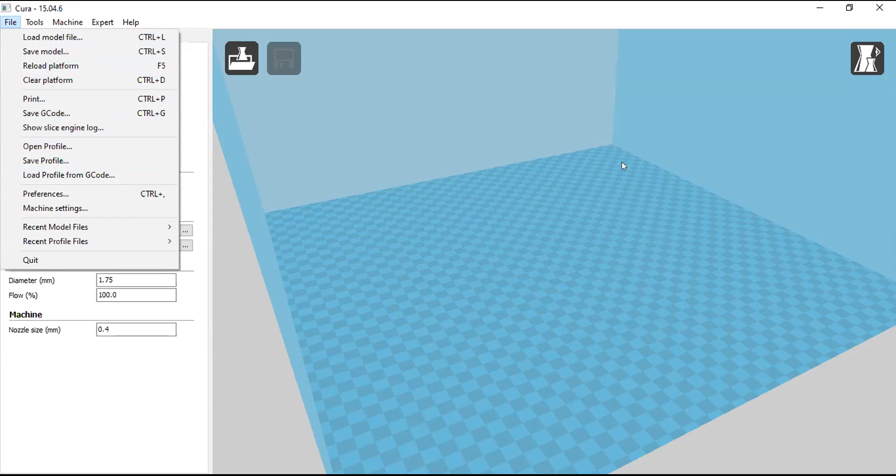So these are the basic settings you can find right here. But in order to get this environment, you just have to set up the machine first. To set the machine, you can see right here the third option, which is the machine.

I have already added the two machines that we have, the first one is the Parmann 3D printer and the Shaperjet 3D printer. Let me show you, when I'm switching to the Shaperjet 3D printer, you see right here in the environment section the size of the build volume or bed volume is changed.

Now you can see the bed volume is changed because this printer volume I have defined, which is 150 by 150 and in height it is 180. So I'm just going to repeat that machine specification of this machine as a new one by adding a new machine.

You can see I'm clicking on the add new machine by using a left click of the mouse button. Once I have clicked on add new machine, you can see this window will pop up. So in this menu, you can see here is the add new machine wizard.

I just click on the next button. Once I have clicked, you can see there is a predefined 3D printer list which comes up, and you can see there is an 'other' option.

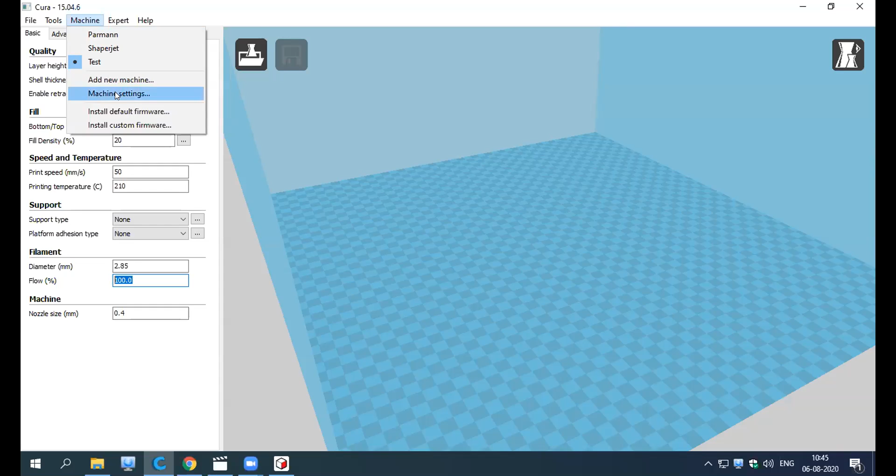So in order to add another extruder in this machine, I'm going to the machine setting right here in the machine option. Once I click, a pop-up window comes up, and I can also customize a Parmann 3D printer right here, Shaperjet, and we have already added the latest machine, which is the test.

So in this case, my extruder count, you can see here right below the dimensions of the build volume, you can see the extruder count. I'm just going to click on 2, because it consists of 2 extruders. Once you are done with this, you just have to click on the OK button.

Now the left side of the window is refreshed. Now you can see here is the filament option. For the first extruder, it asks for the diameter, what kind of diameter you are going to insert in the nozzle of the filament. So now you can see the second diameter of the filament comes appear.

So this way we can add the machine and customize the machines in this software, and you can also observe that we can add multiple machines in this software. Once you are done with the machine settings,

you just have to customize the basic setting according to your STL format. Let's start by inserting a model into this workspace. You can see here is the load option right above the environment section.

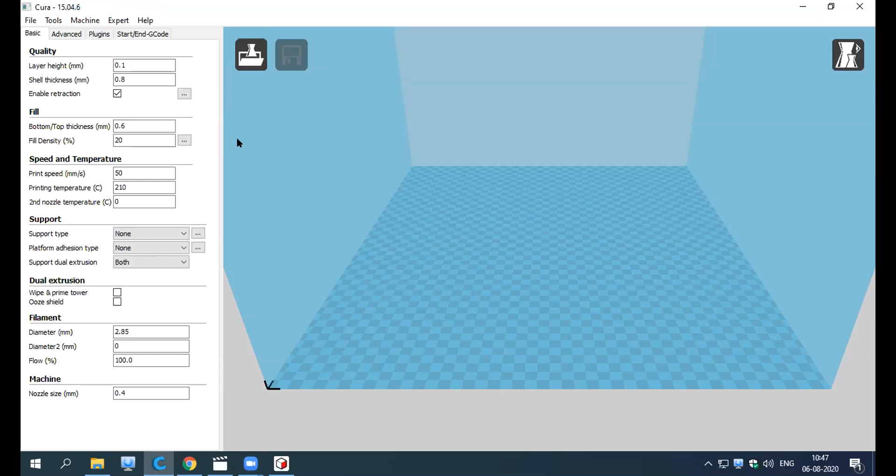So I'm just loading a new material, your STL file, which we designed in a previous session, which is the pen stand design. Once you go to the STL file, you just have to select it and open it, and it appears in this environment.

So in this environment, you can see there is a black arrow right here, which represents the coordinate system, or the position of the extruder, the home position of the extruder. So when I'm going to start the printer or turn it off, my extruder will position at this coordinate system.

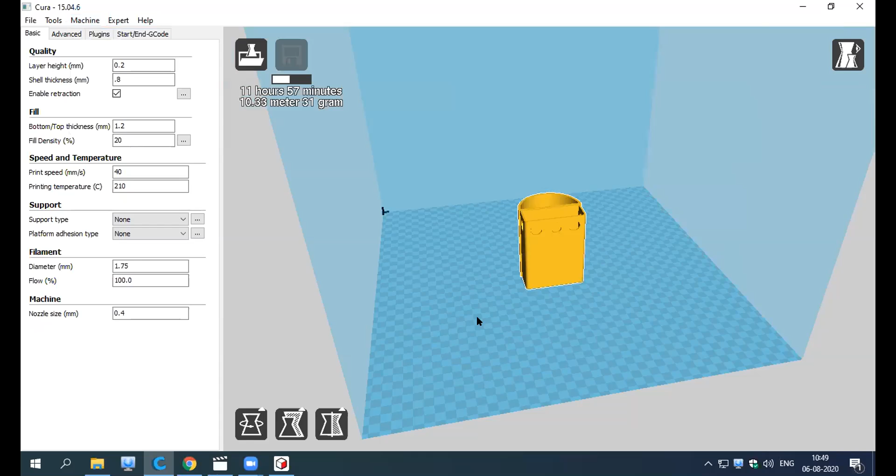So once you have inserted the design, in order to print it, you can see here with this setting, this much time it would take in order to print with this kind of resolution. So I'm just going to shift into the Parmann printer right here. First, you can see, yes.

So in basic setting, at the very first, you can see here is the quality section. It is the first option, which is layer height. The layer height is normally a multiple value - you can define the resolution of your printing process for printing your object. If you want to print in higher resolution, the printing will get slow and it would take double the time. I just pressed 0.1 right here. You can see the time would be double in this case. Previously it was 0.2, and it would roughly take 15 to 20 hours.

So if I'm going into the layer mode, I'll explain this later. I just want to show this: the layer height is the diameter of the filament coming out from the nozzle. That diameter, when placed on the 3D printer bed, becomes the layer height. So I hope you can understand this - the 0.1 layer height means that the material coming out from the nozzle is 0.1 mm in diameter.

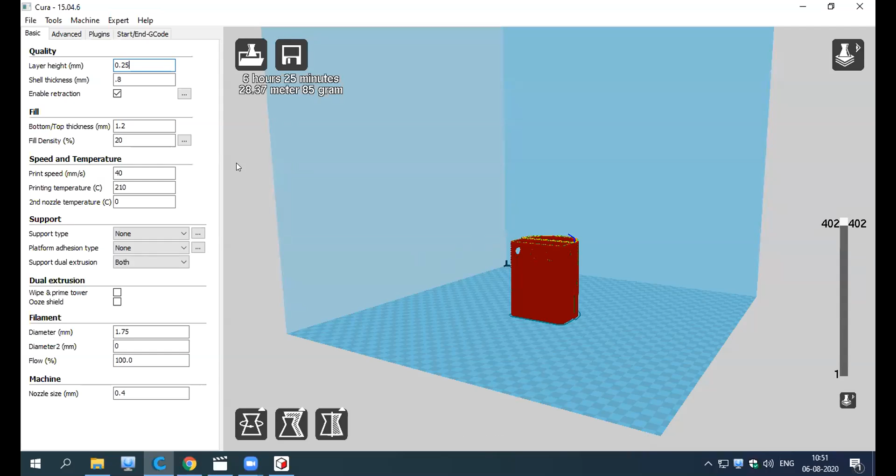So if I'm increasing that diameter, which is pretty fine for the print in order to print all the STL designs or objects, in 0.2 cases we can extend it to 0.25 to get better accuracy. But the accuracy mostly increases when the resolution is refined, or decreased to 0.1 to 0.2. So I always prefer 0.2mm layer height for better strength, better resolution, and printing time would be perfect at this layer height.

So after this, you can see there is a shell thickness. I'll show you what the shell thickness is, right here in the graphic window. Let it complete the percentage. Now it is completed totally. So you can see the red sides of the object are defined as the shell thickness.

So right here, I just put 0.8. Why did I define 0.8? Why not 0.6? Why not 0.7? The shell thickness is a multiple value of the nozzle size. So if the diameter of the nozzle is 0.4, you can print the shell thickness with 0.8, or either 1.2, which is the maximum shell thickness for the object, or you can add 1.6.

So if you mistakenly enter 0.7, it shows yellow, or when you move your mouse into this software, you can see the yellow section comes up here, and it shows the currently selected shell thickness is not a multiple of the nozzle size. So the shell thickness should be a multiple value of the nozzle size.

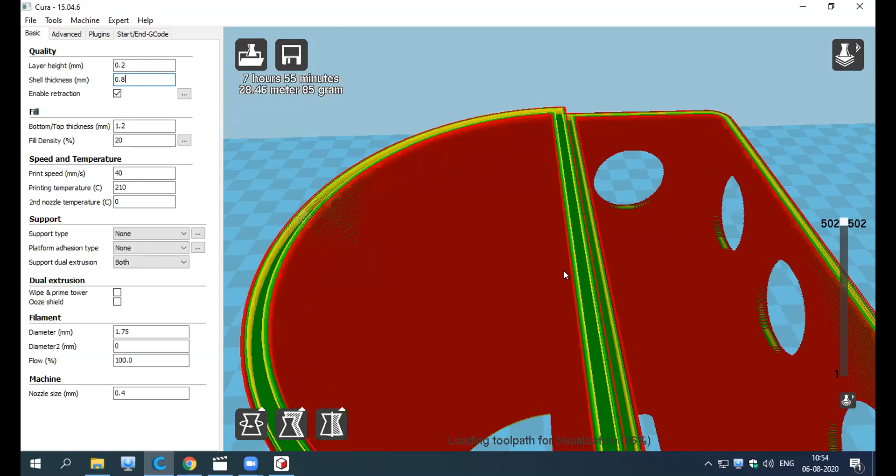So if we're done with this, I'm moving forward with fill. Fill is used to define the fill, shown with yellow color in the object, which is visible right in the environment. In this case, I'm coming to fill density first. The yellow color represents the fill density. Right here, it is only 20% fill density.

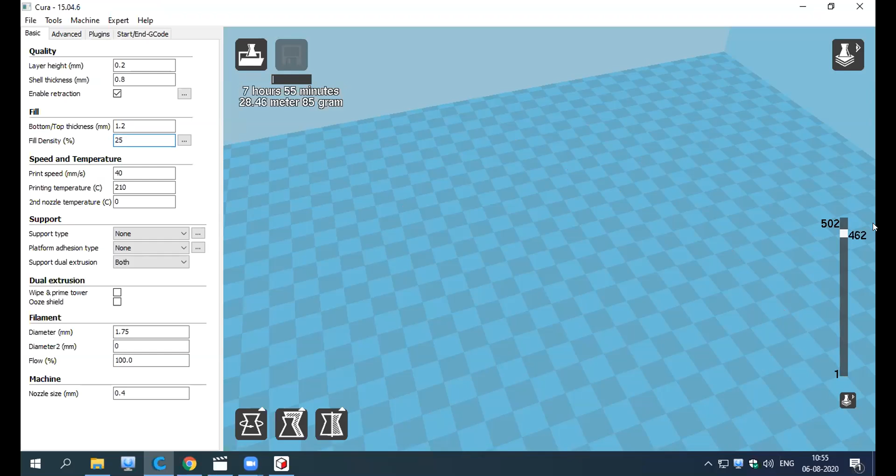We have created the walls of the object, let me bring down that layer. Now you can see the fill density right here. So at 20% fill density you can come up here. If I increase the fill density more for the object, say to 25%, it takes time to refresh the window, and there's some visualization loading. It takes certain time to represent the fill density.

Wait for it. So I'm just adding a few things. The visualization depends upon your system configuration, it varies the time to visualize the object fill density. So you can see once I've clicked on 25%, the density has increased. Now I'm just going to change it to let us say 50%. It's again going to refresh.

So if you are increasing the fill density, you can see the time would automatically increase because more material is going to be added by the 3D printer, and it would take more time to print. Also the consumption of material would increase. Basically we are using a PLA filament, which is polylactic acid. Now the fill density is refreshed, you can see it getting denser by increasing the value.

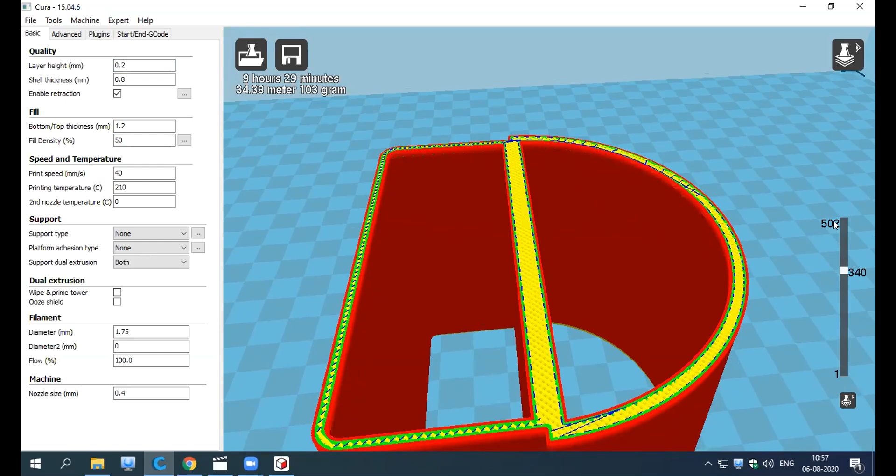You can check by just dragging this bar, and the number represents the layer number from 1 to 502. In this particular case, with 0.2 layer height, it would be completed in approximately 500 layers. So the bed in that direction will go down into the 502 layers. We are particularly right now at 340 layers. So you can see the fill density is continuously the same at all the layers which we defined right here.

So I'm coming to the bottom or top thickness of the object, which I've defined to get better thickness from both sides, even at the bottom or top side of the object. In this object, you can see the top side is totally filled. Whatever mm you define here totally overrides the fill density. So I've filled right here 1.2mm, so the 1.2mm from the object will be totally filled by the 3D printer. You can see how many layers are filled by the 3D printer.

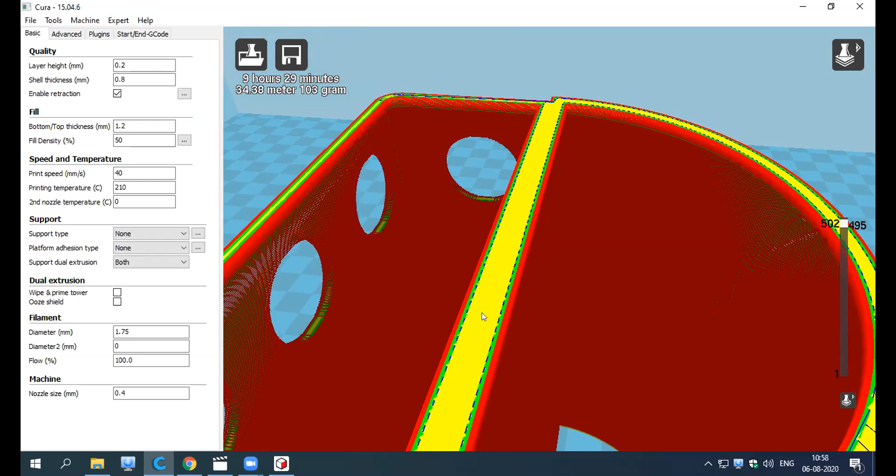Approximately right here, yes. The total 5 or 7 layers is totally filled by the 3D printer for this object. And for the bottom thickness, I'm just moving it to the lower level. See.

You can see the very first layer, which overrides the fill density due to I have just defined the 1.2 mm thickness should be solid from all sides of the object. So first layer, second layer, third layer, fifth layer, and then so on.

You can see when I'm moving to this side, it doesn't show right here because it moves to the further layers, so it doesn't show any visualization for the previous layers that is going to be printed by the 3D printer. So in this case, you can see all the boundaries of the object, because there is no solid part in between in this pocket or the shell.

If I'm moving further, I'm just going to show you. You can see here the blue lines in this object, which clearly define the position of the extruder, like how it is going from here to here, and how it is going to fill this density. So the line represents the traces of the extruder, represented by the blue lines.

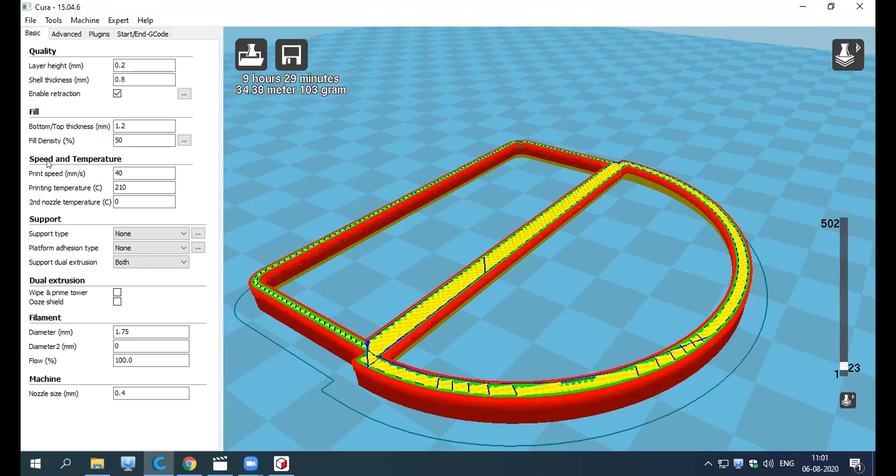So once we've defined all these settings, there's also the third parameter, which is the speed and the temperature. You also need to control the printer speed, printing temperature, which is the crucial part in order to print the PLA object.

So the printing speed can vary up to 50 mm. We can define the printing speed from 35 to 50 mm, which is pretty fine in order to get the maximum resolution or quality. If you are increasing the speed, the quality gets worse. You can see some of the objects get printed roughly from outside or the inside.

It's visible from the walls of the printed object. So I'll show you in the video. If you are very expert, you can play with the printing speed, and you can also play with the printing temperature. So the printing temperature depends upon the filament that you are going to use in order to print the object.

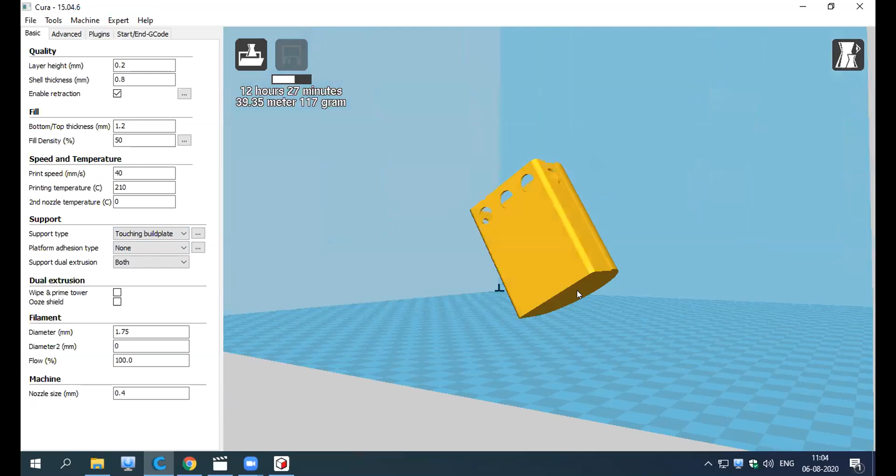If some of the material is overhanged in the air - if I'm just going to rotate this object, you can also rotate this object from this section. If I'm going to rotate this object like this way, you can see some of the material that is overhanged. In order to support this material which is overhanging, you can define the support system for this object, but which is not necessary for this case. So I'm not going to show this right here.

I'll cover all the support system and dual extrusion in the next session. So once you are done with the speed and the temperature, you just have to define the diameter of the filament. So the diameter of the filament also comes with the filament specifications.

You can also see on the print filament box. For our case, the diameter of the filament is 1.75 for the first extruder, and similarly for the second extruder. But right now I'm not using this second extruder, so I'm putting it as 0. The flow of the filament through the extruder should be 100%, so make sure you are filling that right here. And the nozzle size, if you want to change the nozzle, you can also define the nozzle size right here.

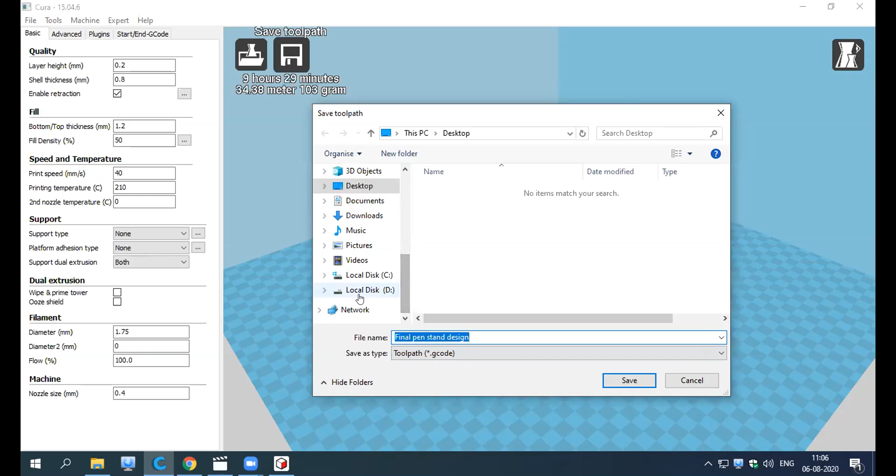So this way we can define the basic settings in this software in order to print this object. Once you are done with all the settings, you just click on the save toolpath option. A window comes up, and you can see the toolpath file save tab in G code. You select the pen drive or SD card, or save directly into the directory. Once you've selected the directory, I selected D, and pressed save. So you can access the G code in the D drive. Once you insert the USB, you can copy it from there to the USB or SD card, depending on your feasibility. Then you just need to insert that SD card into the 3D printer in order to print it.

So this is the Cura software where we can customize our STL objects, and you can see how we can convert it into G code by simply adding a few more settings according to our requirement.

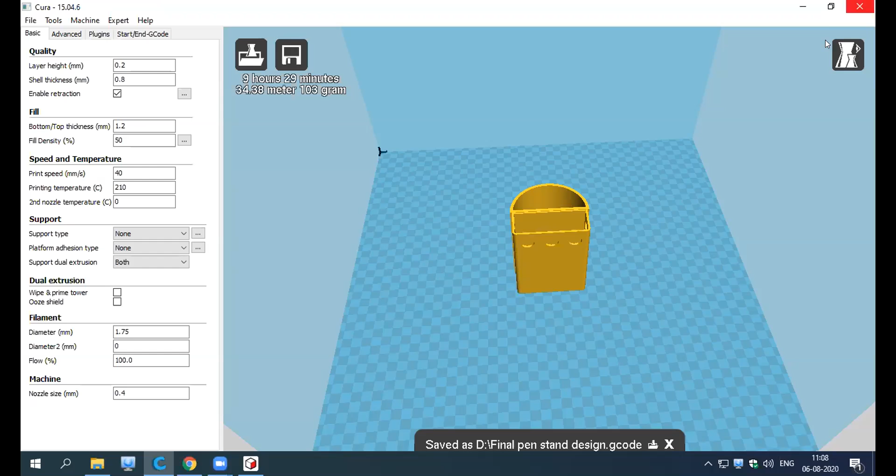Sagar sir, Chandra sir, I suggest you can quickly show the video of the 3D printing without adding anything, so people can relate to what they have just listened to. They should be able to relate it to actual 3D printing. We can just play the video. I prepared a video shot for the upcoming design, which is the nut and bolt. I don't think that's a good idea - you should show the video of this particular thing only, which we showed yesterday also. Don't show your current design, that excitement will go away if you show the current one.

Let me shift to the screen. Can you see my screen? I think you can play it now. Yes, you are seeing my screen. I hope you are.

So these are the settings that I have placed as a screenshot in this video.

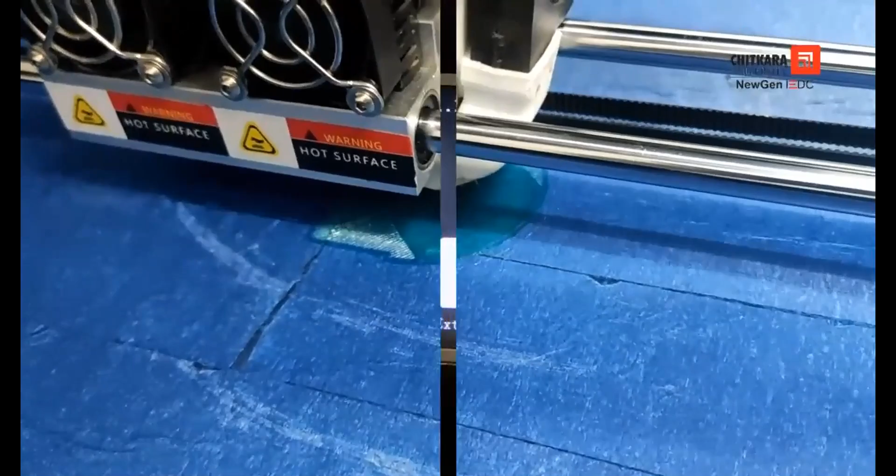So here you are just seeing - I have reduced the speed, and once the material is properly stuck to the printer bed, I have increased the speed from 80 to 100% to ensure that the object is getting perfectly in shape by the 3D printer. So this is almost 15 to 17% of the object completed.

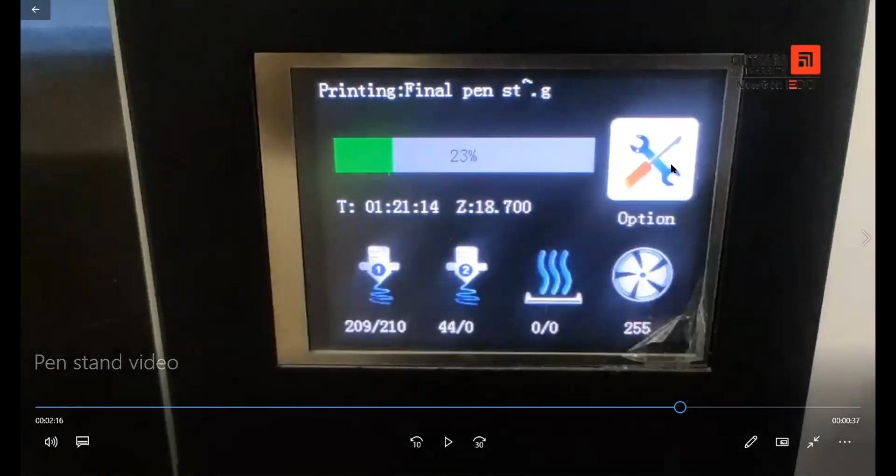You can also customize options which are not required at this time. The advanced options are typically needed at the very first stage, used to reduce printing speed, fan speed, or extruder temperature. If the material is not getting perfect shape, you can change the temperature right from the control panel of the 3D printer. You don't need to customize the printing temperature from this software.

So you're saying you can control the temperature with this machine also? Yes, everything, right? Yes. I think one important thing I've noticed is that let's say you want to

get something 3D printed and you go to an external vendor. If you don't know the intricacies of 3D printing, about density and all those things, there are high chances you can get cheated, because if the vendor reduces the fill density, the cost comes down for him but he can charge you more. Can this happen, Chandra sir? Yes, it happens sometimes, sir. If we know what volume it would take to print that object, we can understand how much time it would take.

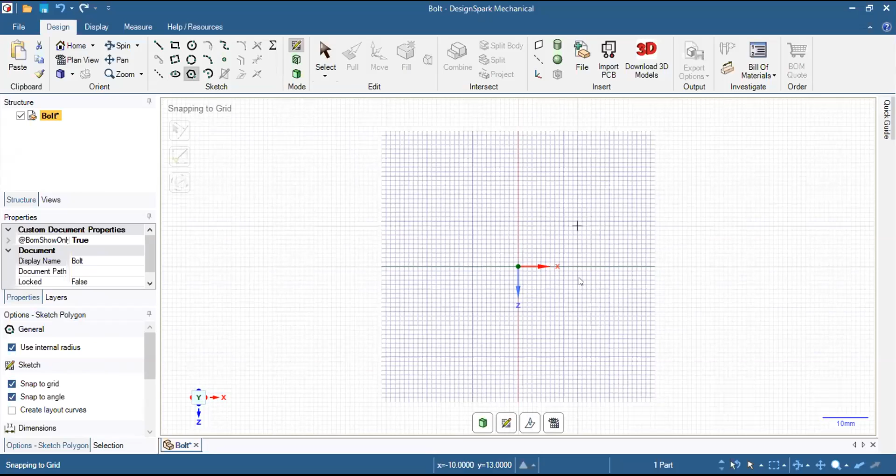Here you can see the coordinate system, which is XYZ, and I'm just clicking right at the center of the coordinate system, which is 0,0. Once I have clicked the left click button, the parameters of the hexagonal shape appear.

There are three parameters you can see. The first one is the diameter of the circle, which changes the size of the polygon. For this particular case, I just fill in the 20 mm diameter.

By just entering the value from the keyboard, and once you are done filling the diameter, you press the tab button to define the angle. If that angle is perfect for you, leave it as it is. You can also press the tab button again to define the number of sides you want in this polygon.

In this particular case, we need 6 sides, or you can also define the number of sides — if you want an octagon, you can define 8 sides. Once you fill in the value for the sides and press enter, you can see the sides will be changed.

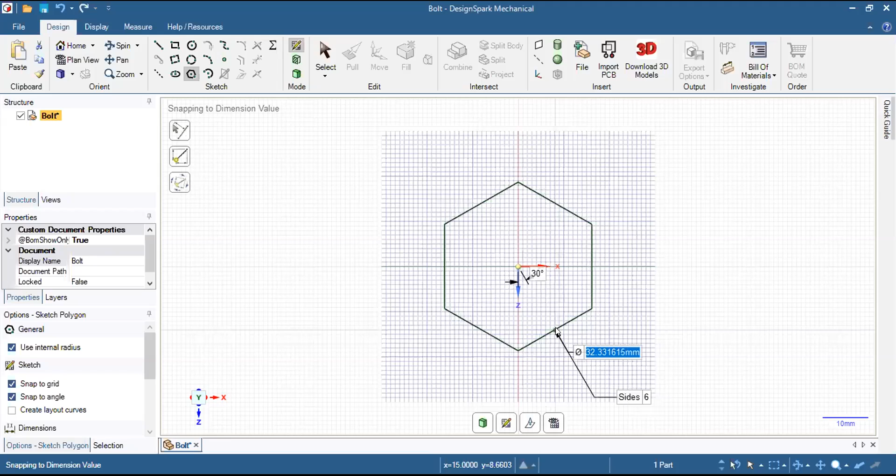In this case, we need 6 sides only, so I just press 6, and you can see the 6 sides appear. I'm just going to freeze again the diameter.

Once you are done with all the parameters of the hexagon or polygon command, you can see the hexagon shape appears. Once the hexagon shape appears, you just click on the pull command in order to convert it into 3D mode.

Once you are in 3D mode, you can see all the lines are converted into surfaces, and you can click on the home view to get a proper view. Once you are in home view, you just click on the surface of the defined sketch.

Convert it into 3D by just clicking the left mouse button. You can see the dimension will appear, and in order to freeze it, I'll just define it as 10 mm right here. So this way you can see the head of the bolt has been built in the environment.

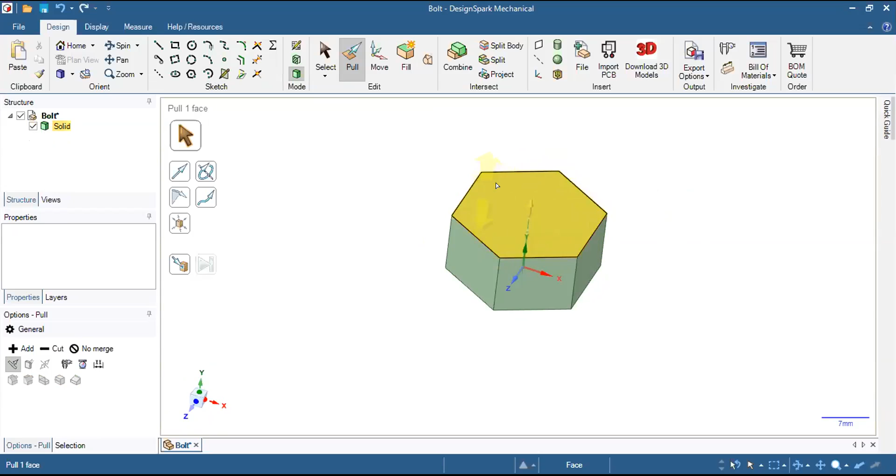The next step would be the shaft or threaded part of the hexagon bolt. In order to draw that part, you just have to select the appropriate face for the hexagon head. In order to select that, you just need to go into the select button.

Once you are in select mode, you just have to select the plane of the solid. Once selected, it converts into yellow color, and then you click on the sketch command. Once it's selected, the grids are available, and in order to get maximum accuracy over this plane, you click on the plan view.

Once it appears perpendicular to the screen, you just have to draw the circle right here, because the threading is only defined on the circular part of the bolt.

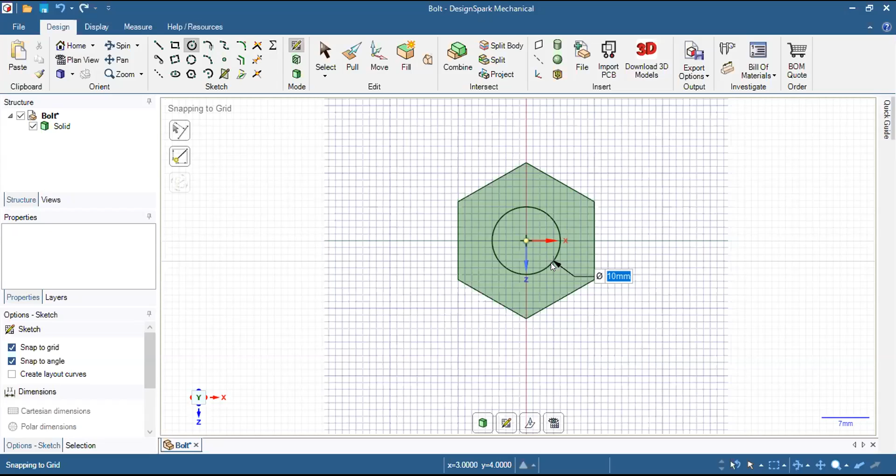So the circle, the center for the circle would be at the same point from where we just started the hexagon. So the diameter for this cylindrical surface would be 10 mm.

Once it is defined, you just need to exit from the sketch mode by clicking on the 3D mode or on the pull command. Once you do that, you can see it is converted, and you can see the other surfaces that appear.

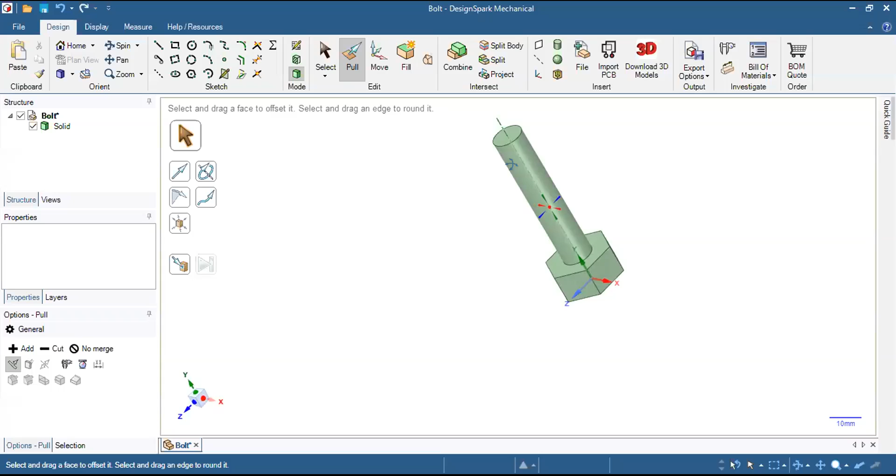In order to convert it into 3D, you just need to select the pull command and move it into the positive direction to get a cylindrical shape where we are going to draw the threading. The height for this cylindrical shape would be let us say 50 mm. So you can see the raw shape of the bolt has been built this way.

Once you get this shape, only two things are left in this design, which is the threading and the chamfering of the head bolt. So first we are going to draw a profile of the threading onto the particular cylindrical shape. In order to draw the threading on this cylindrical shape, let me ask the participants a question: how to do the threading?

Let us see what answers we get. Can we get answers on how to do threading in this bolt? So far it has been a very simple design — we have taken one hexagon and one circular shape and just extruded it, nothing new from what we learned in the first 2 days. So can anybody give an answer on how we will do the threading on this structure? I hope you understand what threading is. Chandra, can you show the photograph of the nut and bolt which you made, the final one, so people can answer this question?

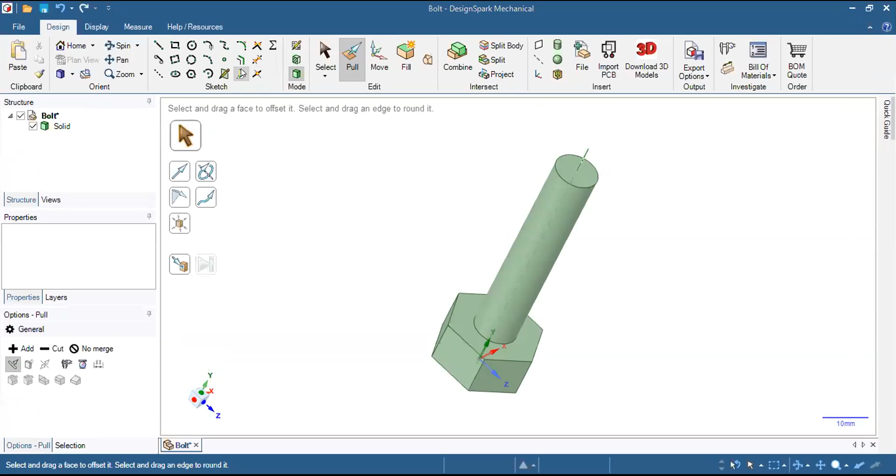In order to draw the threading into the particular shape, you just have to select the plane first. You can find it in the insert window where the plane option is available. To generate it, you just select it and click on the axis, or you can generate the plane on any face of the object this way. Just move your mouse onto the plane, and the plane will appear, but to freeze it, you have to click the left mouse button.

In this case, I just need a plane at the axis of the bolt, so I'm going to select the axis and click the left mouse button. Once clicked, you can see the plane appears, and I'm going to disable this plane command by pressing the escape button. This way, when I move my cursor to the plane, it converts into sky blue color, showing the generated plane.

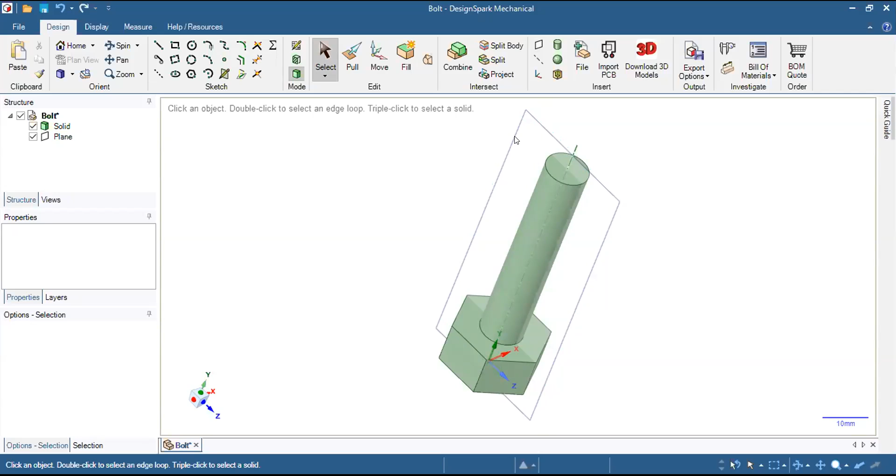I'm going to select it in order to draw a sketch on this particular plane, going into sketch mode by selecting the sketch mode command. You can see the sketch mode is turned on, and to get maximum accuracy, I click on plane view. Once we are in the sketch mode, we just need to draw the profile of the threading.

So the profile is revolved around the axis. I'll come to that later, but before that we need a profile which we are going to revolve around the axis in order to impression the threading on this cylindrical component.

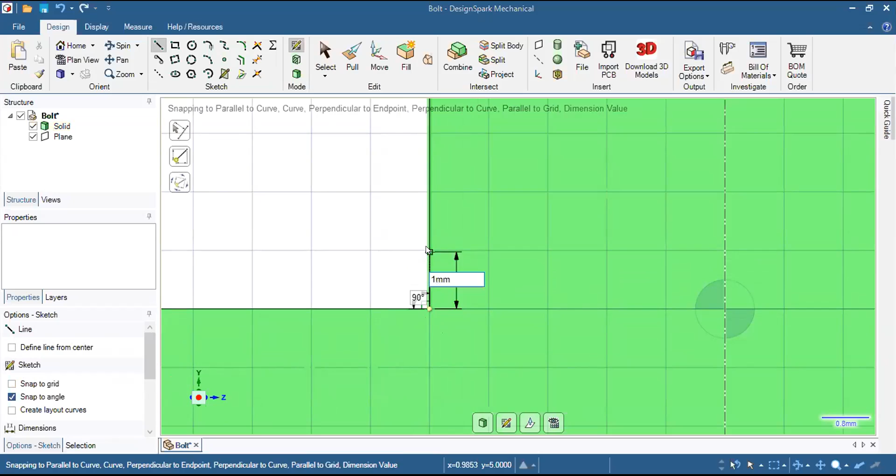The profiles vary. If you have gone through the visualization of the bolt, you can see different kinds of profiles are available for the bolts. In this particular case, we are just generating the V threads on this bolt.

In order to get the impression over the cylindrical surface, I'm going to draw the V shape right here. So you can see the V shape has been created, and I'm just going to disable the command by pressing escape, and go into select mode to customize it a little bit.

You can see here the profile has been generated. The V profile for the threading is generated, and I'm just going to revolve this profile around the cylindrical face.

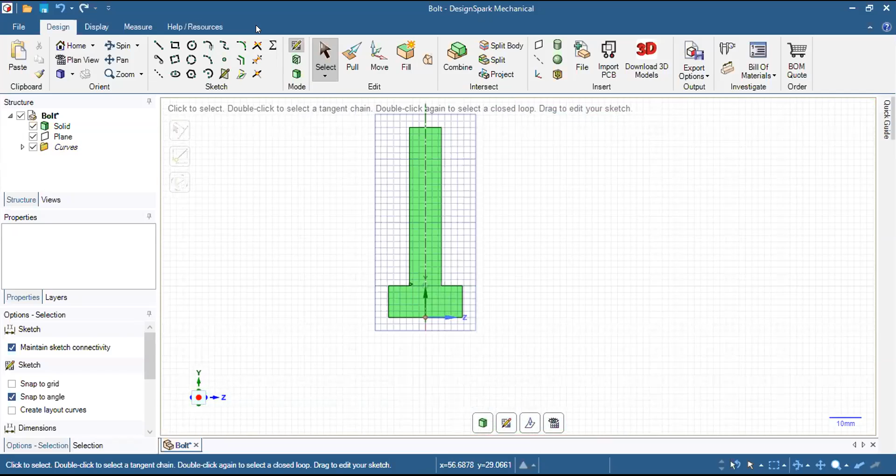In order to do this, you need to exit from the sketch mode by clicking on the 3D mode. Once you are in the 3D mode, you can see the profile that we generated in the sketch mode is converted into surfaces.

Once you select this and zoom in, you can see it is selected right here, but you are not able to select it directly from here because it is inside the cylindrical surface. So in order to select this surface, you just have to go into the structure section and select right from here.

Once it is selected, you need to go into the pull command. Once you are in the pull command, you can see additional options appear, and in these additional options you can see the revolve command is right here.

Can you just go a little slow? You are going a little fast, I think. Can you go one step back to where you are selecting this surface on the structure? Okay, till here it is okay. After this step, okay, okay.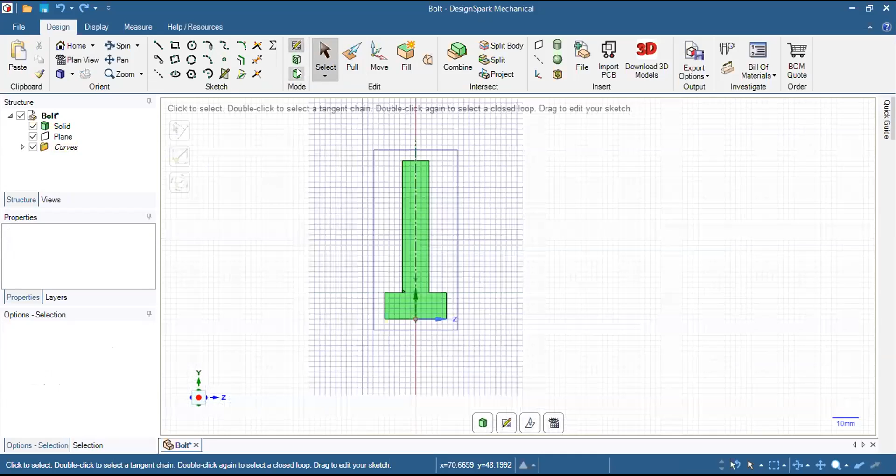So you can see we are moving into the 3D mode. In order to select the surface, you can select right from the structure menu by clicking this with the left mouse button.

But I was just saying you are not able to select this surface right from here. If I zoom in, you cannot select it from here because the face of the surface is inside the solid, the cylindrical surface of the bolt. So in order to select the entire surface of this profile, you just go into the structure menu and select this surface.

Once you have selected this, you see it turns orange, and the profile is selected.

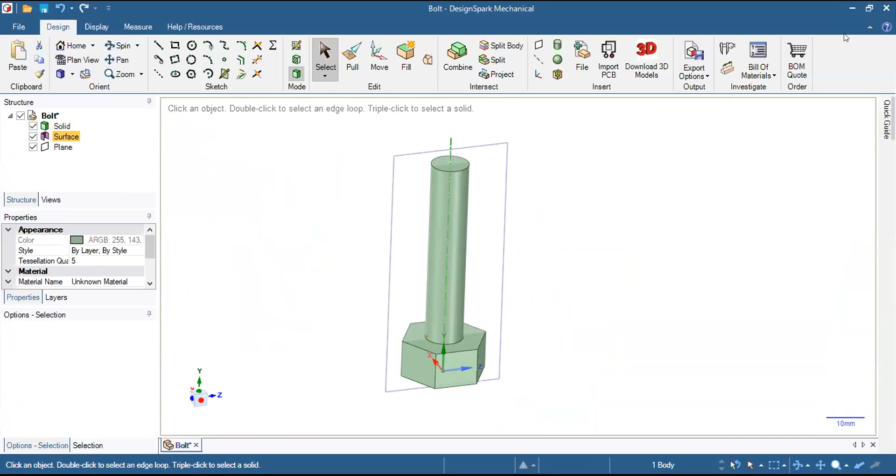Once it is selected, you just need to revolve this profile around this axis. Once you revolve this profile around this axis, the impression would be created over the cylindrical surface. So I hope it's understandable that whatever profile we generate on this plane is impressioned onto the cylindrical surface.

In order to actually, just a moment, one person has written in the chat box, please go a bit slow. I think this is a new thing and a little intricate, so people are finding it a little difficult to understand, maybe you can go a little slow on this. I suggest you repeat the last step once again from going from 2D to 3D, and also there seems to be a problem with your voice, it's cracking in between and sometimes not audible. Is my voice also like that? Can you hear me clearly? Yes, sometimes, I think it might be a connection issue. So then you can be a little louder and a little slower, because I think this particular element is quite important and people are not following.

Okay, I just want to confirm from where I should start in 2D. Okay, from 2D it was okay where you made that shape. After that, when you're coming to 3D and selecting it, I think from there you can start again. So this, till here, it is okay.

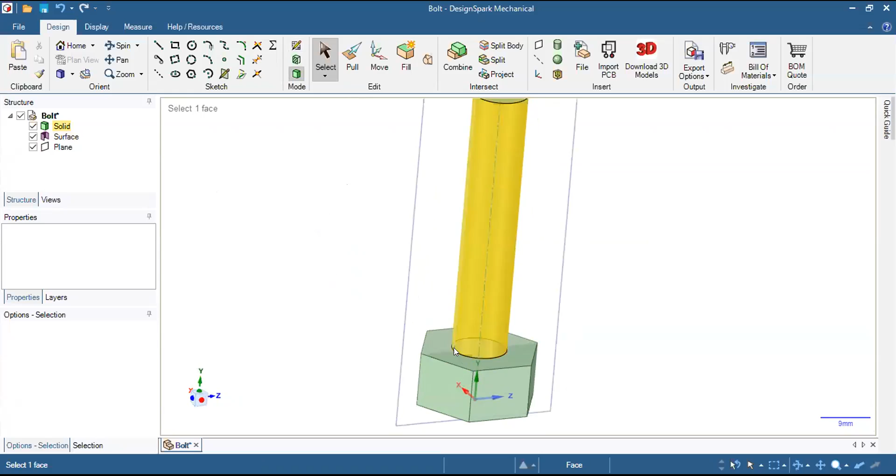So to select this particular surface, you just need to go into the structure bar right below the menu system. Here you can see the surface that has been drawn in the sketch mode. I'm going to select this surface because you're not able to select it right from here, since this surface is generated inside the cylindrical surface.

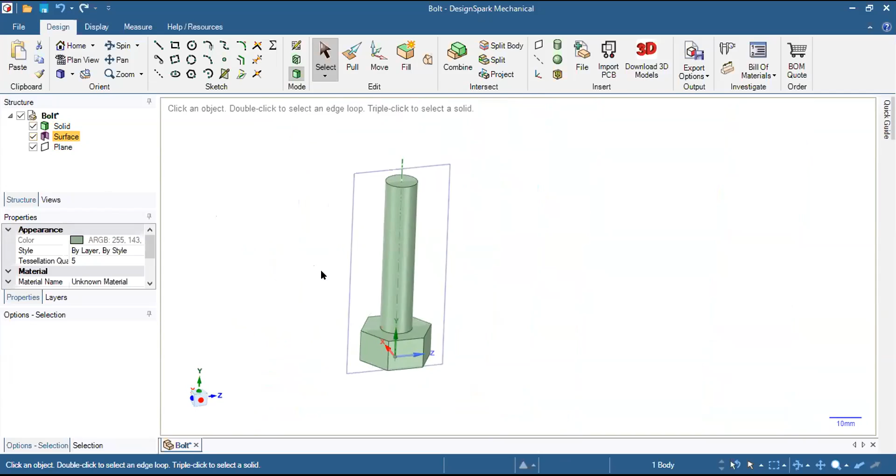So you are not able to select any surfaces or objects which are already inside another object. In order to select this surface, you just have to click right here. So it turned orange. Once it's selected and verified, you just have to revolve this profile around this axis to create the impression on the cylindrical surface.

In order to impression it, I'm just going into the pull command. In pull command, you can see the very first command, which is the revolve command. The revolve command is basically to revolve any generated profile around an axis or a plane. In this particular case, we are just revolving this profile around the axis only. I'm going to select this command by clicking the left mouse button. Once it's selected, you just have to click on the axis.

I want to revolve the generated profile around this axis, so I'm going to select this axis. Once it's selected, you can see it turned blue. Once it's turned blue, you can see the advanced options are available right below the property section. Here is the general setting, and further down there is the revolve option, in order to customize the revolve of the particular profile.

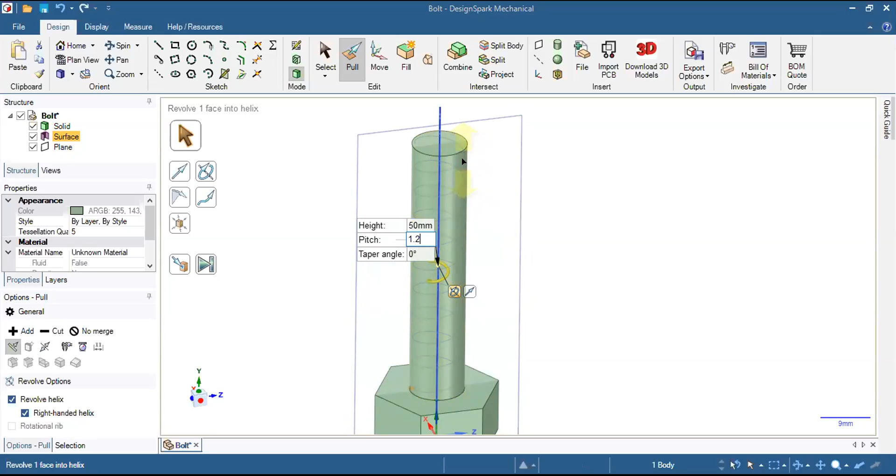So there is a second parameter, which is the pitch. Pitch is defined as one revolution of the helix. In this case, the height between one revolution would be 1.2 mm, because we define the height of the profile as 1 mm. So the pitch would be 1.2, which is the standardization for bolt threading.

Once you have filled the pitch, I kept the taper angle at 0. You can see once I filled the pitch, the helix profile has changed - I hope it's visible to all clearly. I'm zooming in so you can see the helix has been updated from 5 mm to 1.2 mm pitch.

Once it is defined, I press the enter button. Let me repeat it again: 50 mm, 1.2, and... I hope there might be some issue.

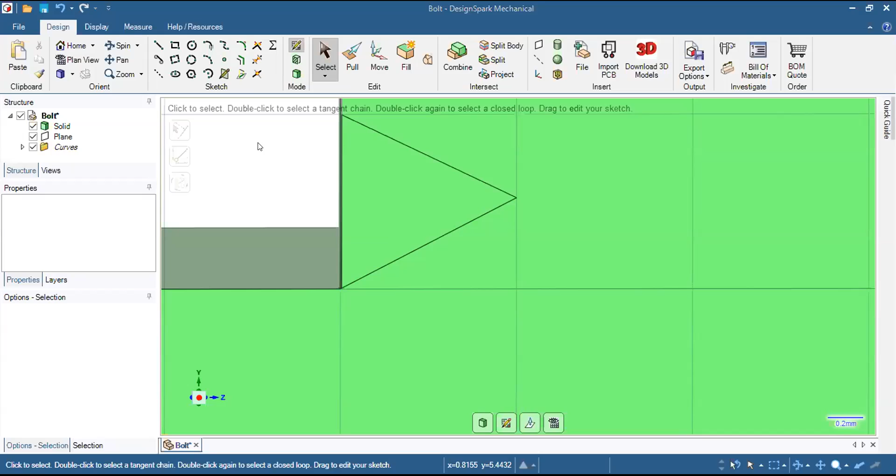Once created into the surface, I'm just going again into the revolve, selecting the axis and clicking on the revolve, defining the 50 mm and the pitch, which is 1.2 in this case, and pressing the enter button. Why is it not 50?

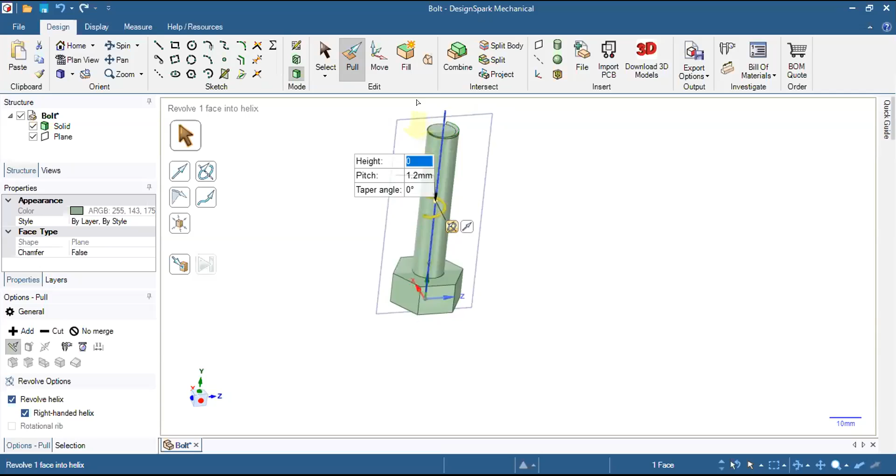Okay, let me check - there is some issue in the profile. I'm going to redefine the profile which has been generated in the sketch.

Let me go into the profile mode again. So there might be some issue in the profile. I'm going to delete this particular profile. I'm just going to generate it right above the cylindrical surface.

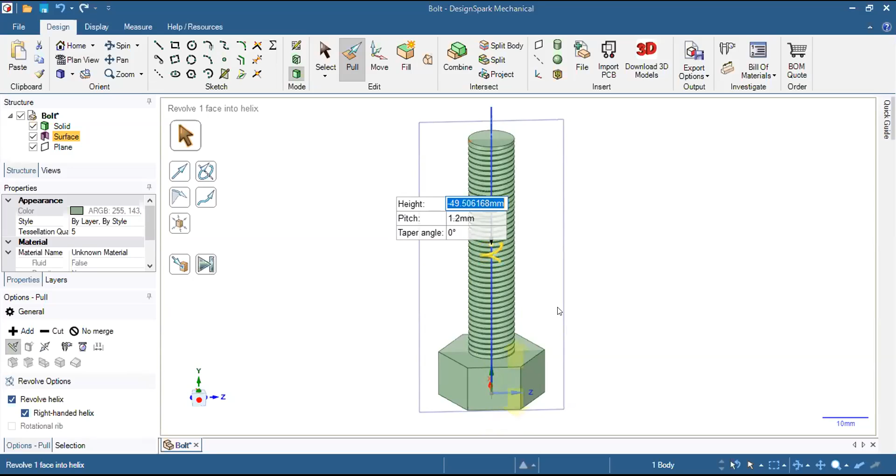I'm going to freeze it, pressing the value -50 and pressing the enter button. So you can see the threading will appear, and it is generated on the bolt. Previously there might have been some issues in the profile generated in the sketch mode, so I generated the profile again over the cylindrical surface, and you can see the threading has been generated.

Over the cylindrical profile. Can you repeat the last step again, a little slowly maybe, after doing everything, when you are just making the thread on it by dragging it? How are you doing it? You're pressing the button, holding it, and dragging.

Yes, once the parameters come up here, you just need to define the first value, 1.2 mm. In order to play with the height, you just have to click on the helix by clicking the left mouse button. I hope it is clear.

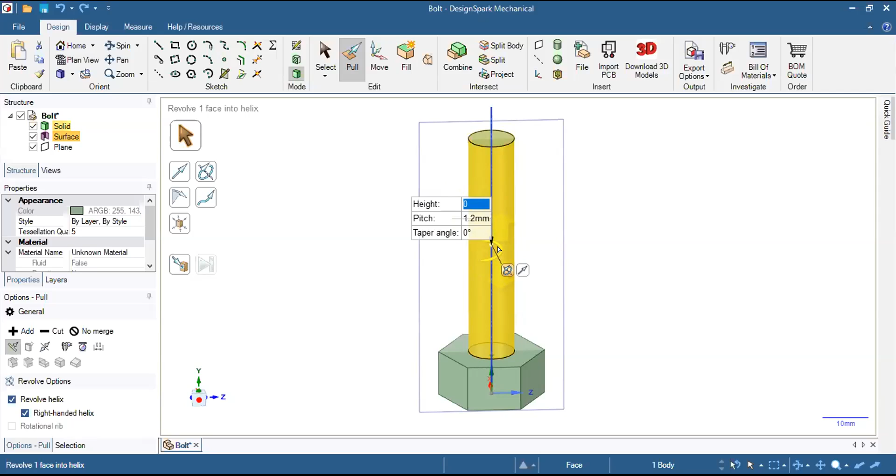Once you have clicked the left mouse button on the helix, you just need to drag in the downward direction. You see the height appears as a negative value in the checkbox. If you want to freeze that dimension, you just have to press the spacebar button.

Once it is freezed, I release the helix. My mouse got released, and I fill the required dimension, which is in the negative direction, which is -50. Once it is filled, you just have to press the enter button.

Sorry, I'm doing it again. Once the profile is selected, revolve.

See, we were here, right? -50, or we can directly fill the -50. See, the threading has been generated.

If you are not comfortable dragging the helix into the downward direction, you can directly fill -50, and the helix will be generated over the cylindrical surface. I hope this is understandable to all the participants, how we can generate the threading over the cylindrical surface.

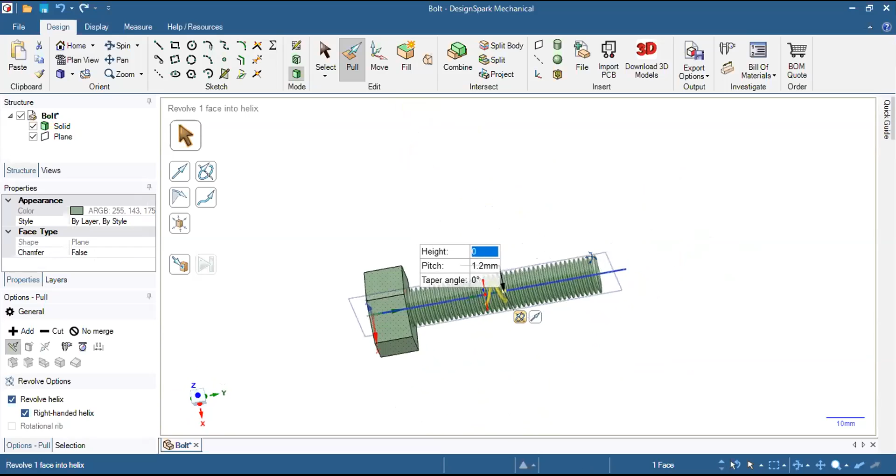Once it is generated, the last part is left in order to create a chamfering over the head bolt. In order to create that, I'm going to disable the pull command first by selecting the select command. Once it is selected, you see I'm...

John sir, we lost your audio. Hello? Hello, is my voice audible? Now it is audible, we lost it actually. Okay.

So in order to generate the chamfering over the head, you just need the... there is a question from the participants. Let me take that later, you can complete this part. The surface created for thread, sir, you can now finish this part, we can take the question later.

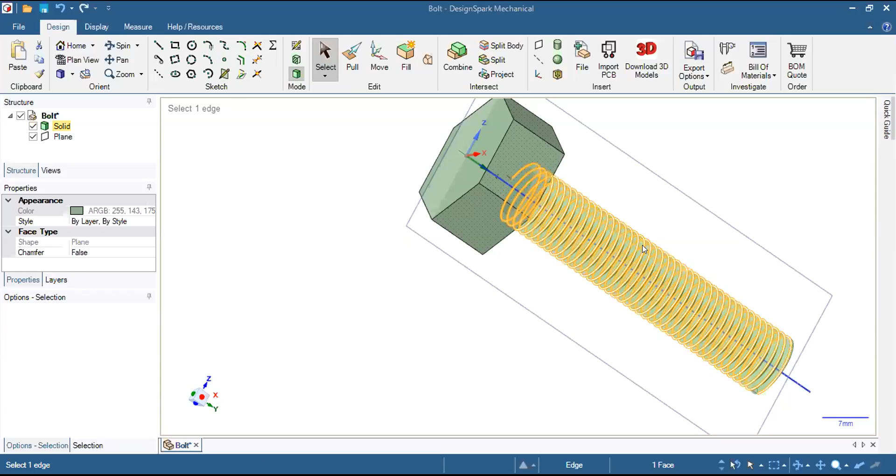While we were getting an error while keeping that at the bottom, does it matter? No, ma'am, this doesn't matter. I think it was an issue with the profile. I just created the profile upside to avoid the error that comes from the bottom side. So you can define the profile on the right side of the cylindrical body even. In this case, I have just defined the profile of the thread at the upside of the cylindrical surface. I hope this is clear to you, ma'am.

So now we are moving further to generate the chamfering over the bolt head. In order to do this, we just need another component in the structure menu. Once you right click on the structure section, you can see a bolt.

When you right click, you can see the following options are available, but here we just want to enter a new component in this particular structure. So I'm just clicking over the new component. You can see the new component is added.

I'm renaming it as chamfering, or also you can name it as chamfer.

So you can see the chamfering has been inserted by using a new component, but the chamfering is not just created; we just need to create it by generating a sketch over this component.

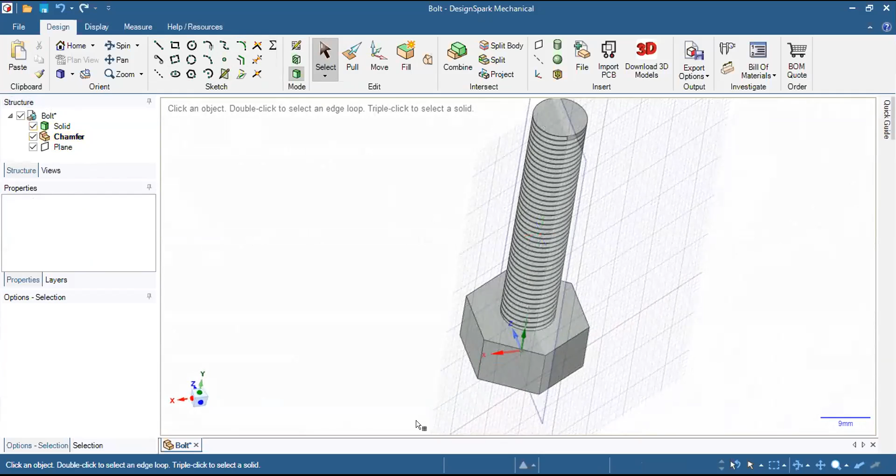So you just need to select this component first and go into the sketch mode. You can see the plane appear, but in this particular case, I just need the plane right at this side. Here.

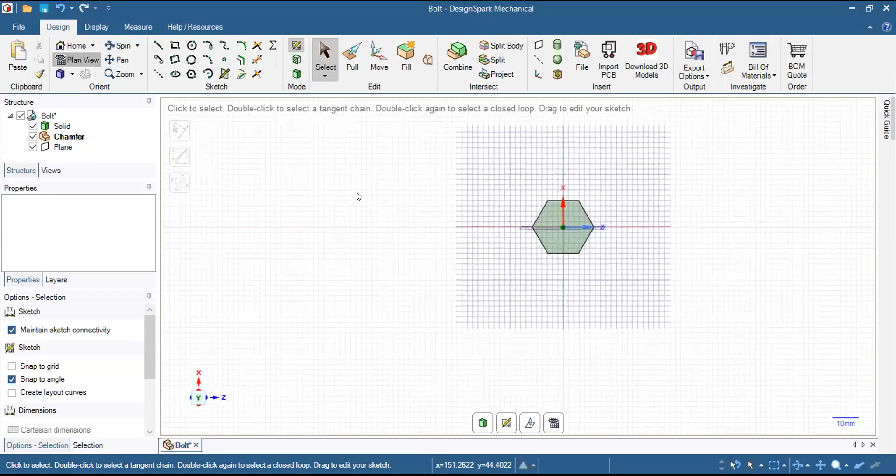So right here, I'm creating another hexagon shape to this particular solid. I'm selecting the polygon, and clicking right at the center where the previous polygon was drawn, with the same diameter, which is 20 mm. Once it's drawn, I click enter. You can see the hexagon has been built over the sketch, and now I'm going to convert it into 3D.

In order to do this, I'm going to the pull command. Once in the pull command, you can see there's a surface which is a sub part of the chamfering component. When I move my mouse over this plane, the surface is highlighted yellow in the structure, which makes me sure the correct surface is going to be selected so I can convert it into 3D.

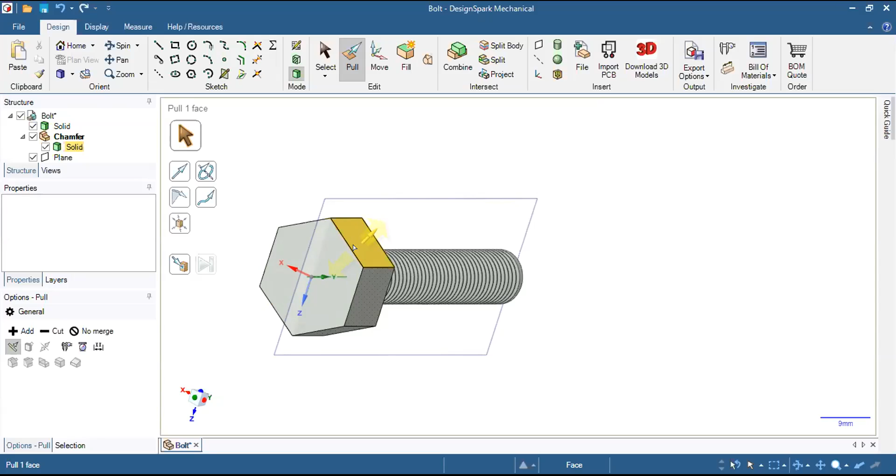So in order to do the chamfering, previously we used the dress up feature to provide round corners around sharp edges. Here, to the sharp edges, we want to provide chamfering, which is the inclined line between this edge. I'm going to select this edge, and by pressing the control button, select another edge, and the same for this edge, this edge, this edge. Like selecting folders in a window, you press control and click over the files to select them. The same method is applied here to select all the edges of the component.

Once all the edges have been selected, you can see in the dress up features the second command, which is the chamfer. Once I select this command, an arrow appears over the edges.

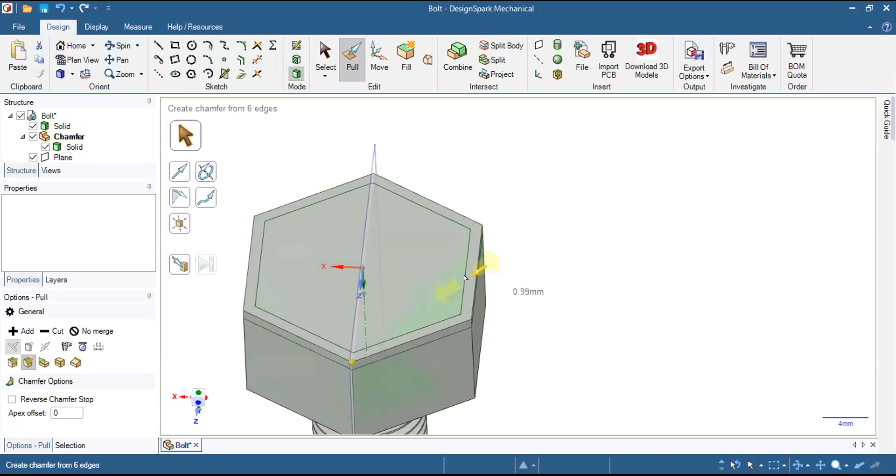I click the left mouse button over the arrow and drag it towards the solid, and you can see a 0.99 mm dimension appear, continuing to change as I move in this direction, or reducing when moving backward. To freeze this, I press the space bar, and the chamfering dimension will appear. Here I'm filling in 1.5, which would be fine for this case. Once I fill in 1.5 mm and press enter, the chamfering has been applied to this particular solid.

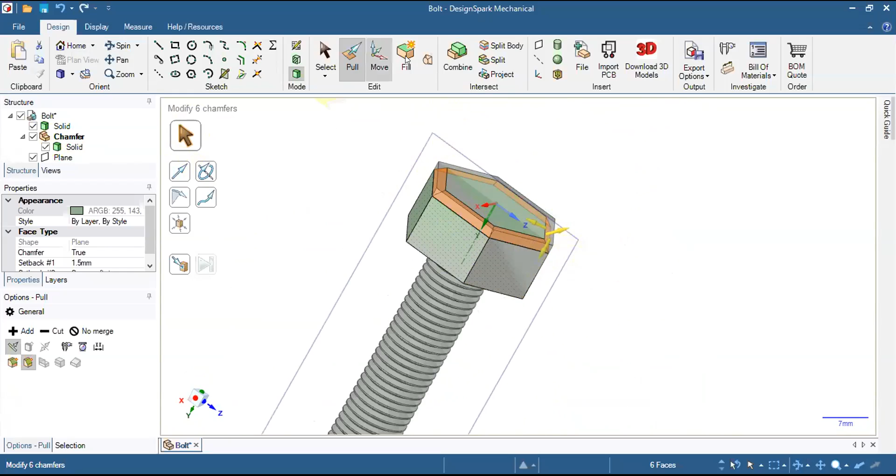Once the chamfering has been defined for this solid, we need to use the combine command again with the intersection option. To use this command, I click on the home screen to get a full preview, spinning it around this way and a little downward. As mentioned previously, the combine option can be used to combine two components into one, but in this case we're using the combine command to split two components into different parts.

In order to split the components into different parts, I click on the combine command, and you can see there's a cutter option. Once the cutter option is selected, you just have to select the other solid, which is the previously drawn one - you can find it in the chamfer section, which is a sub part of the bolt.

So you can see, once I have clicked on the solid, the following components have been generated. In order to see the perfectly created chamfer over this bolt, you just need to disable the required feature.

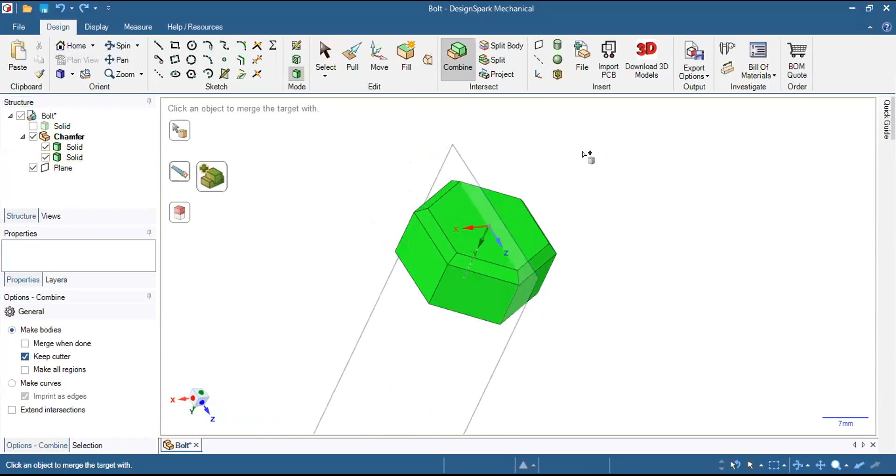Let me repeat this command once again. You can see the chamfering that has been provided to this circle, to this hexagon.

We are going to select the combine command. So here, the software is asking to select the first component. I'm going to select this bolt first. So what part I'm just going to remove, which is the solid. This part, you can see, the bolt has been created with multiple solids. So from this section, I'm just going to disable the parts that are not required.

So this way we can generate the chamfering and split other components into different parts. This is the final shape of the bolt. So this way we can generate the chamfering over the surface and split it into various components.

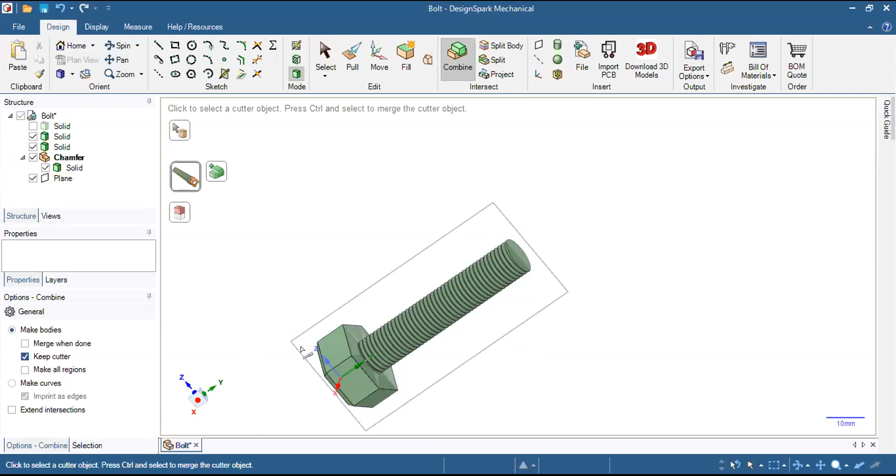Just a moment. Hello, can you hear me? Chanpit, are you getting my audio? Hello. No sir, you're not getting any audio. Are you getting my audio, Chanpit? Yes, right now I'm getting the audio, sir.

Okay, so let me take a few questions if people have. Does anybody have any question on this part? I think it was a bit tricky. So do we have any question, or shall we move ahead? Nobody is responding to my call. Do we have any question?

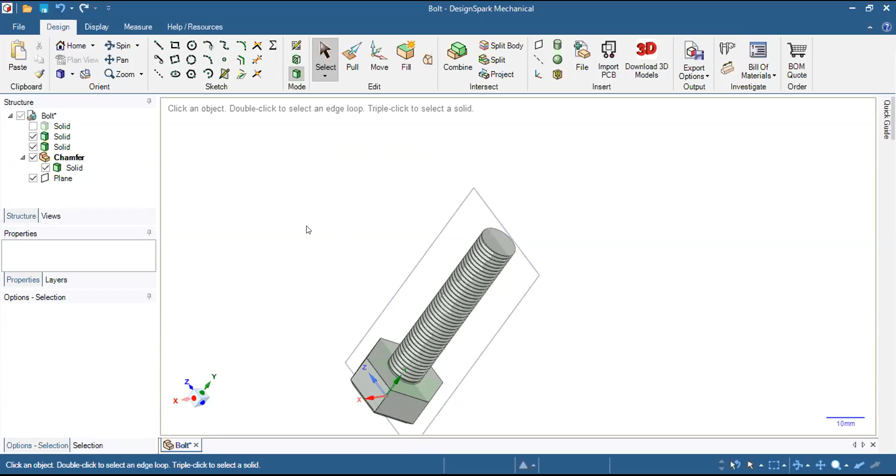Chanpit sir, how long will it take you to do the bolt part? Sorry, the nut part. Is it too time consuming? No sir, it's not time consuming. So I think you repeat the chamfering part once for the audience. I'm sure some people missed the step because there were a lot of steps involved and a lot of selection. And why actually are we doing the chamfering? Why can't we do a simple round shape or something like that? That also you explain. Okay sir. Yeah, but make it a little quick, huh?

Sure sir. So here you can see we are in the previous view, which is the bolt. So in this case I'm just entering a new component in the structure menu in order to provide the perfect chamfering to the bolt head. Once it is selected, you can see it asks to rename. I'm providing a rename as chamfer.

So once it is renamed, I click enter, and I'm going to select this component in order to generate the profile of the chamfering in this particular component. So in order to draw this, once I have selected, I need to go into sketch mode. Once I am in sketch mode, I have to select the appropriate plane. So the base plane would be fine for this case. Once I have selected this... no, this is not the base.

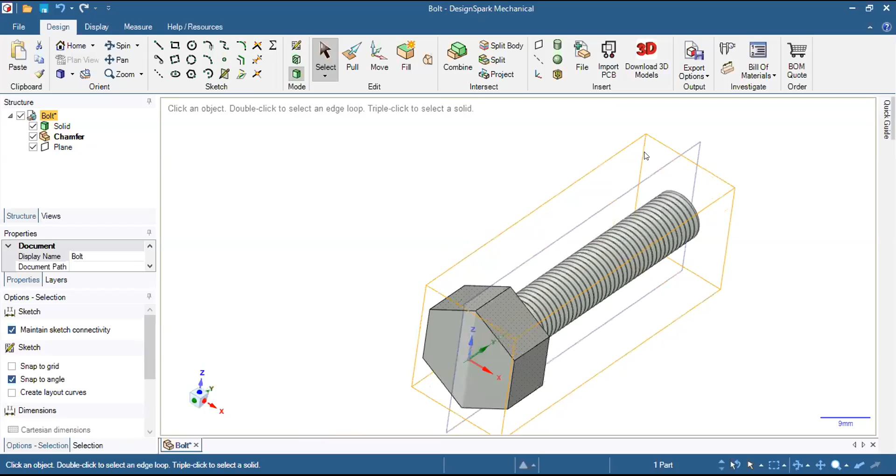So I'm going to select the sketch mode again. You can see this is the base, so I'm going to select this plane. Once the plane is selected, you can revolve it, spin it this way. Once it is in the perfect view, you just go into the plane view. You can see the plane is perpendicular to the screen, and I'm just going to draw another component right over this plane in order to provide the chamfering to the bolt.

So in order to do this, I'm just going to provide the chamfering by using the circle command.

So I've selected the circle and the previously marked center of the coordinate. This is the second way of chamfering, by selecting the circle command, and basically it provides the perfect shape to the bolt head.

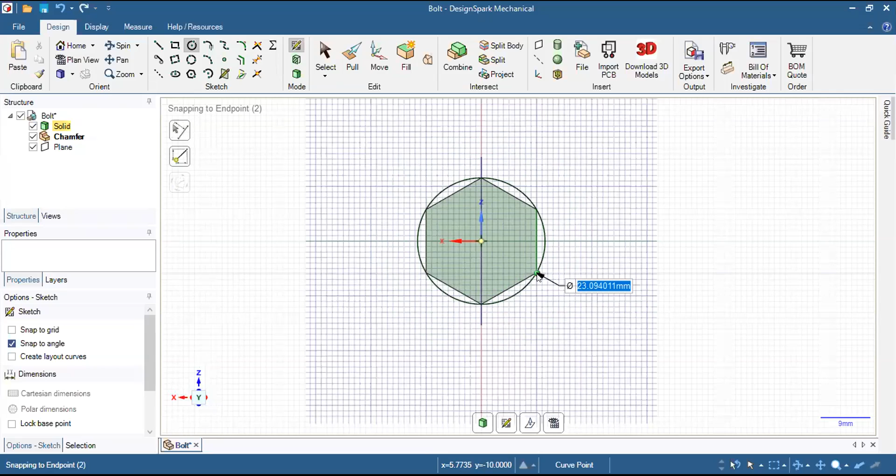You can see, once the corner of the hexagon bolt head is joined at this corner, it appears as a green color. You can see right here it shows the diameter of that circle. Once it coincides at the edges, just press the enter button.

Once the diameter has been fixed, I'm going into the pull command in order to convert it into 3D mode. You can see there is another surface which has been converted into the component, the chamfer component. I'm going to convert this surface into 3D by using the pull command, moving it into the positive direction.

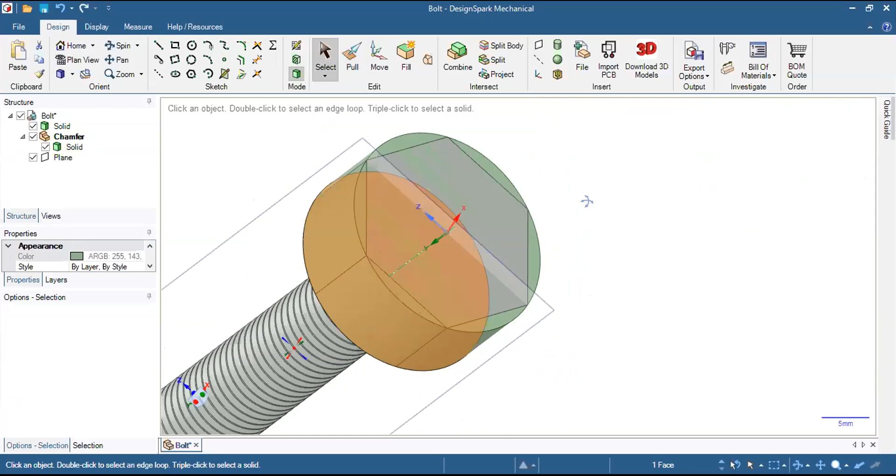The height for this typical component would be 10 mm. You can see the component covers the bolt head. Once it is covered, you just go into the select mode in order to release the pull command. Once it covers the bolt head, apply the combine command to these two components.

In order to apply the combine command to this component, I'm just going to select the combine command, and select the first component, which is the sub part of the bolt. So I'm going to select this solid, and once it is selected, I'm going to select the cutter.

So to split into the sub parts, it's again asking to select another solid, from which solid I'm going to split into the different parts. So I'm going to select the second solid. You can see the various parts.

But before that, I will first provide chamfering to this particular cylindrical surface. I'm filling in 10 mm. Once the component covers the other component, which covers the bolt head, I'm providing the chamfering around this cylindrical surface by clicking over the edge.

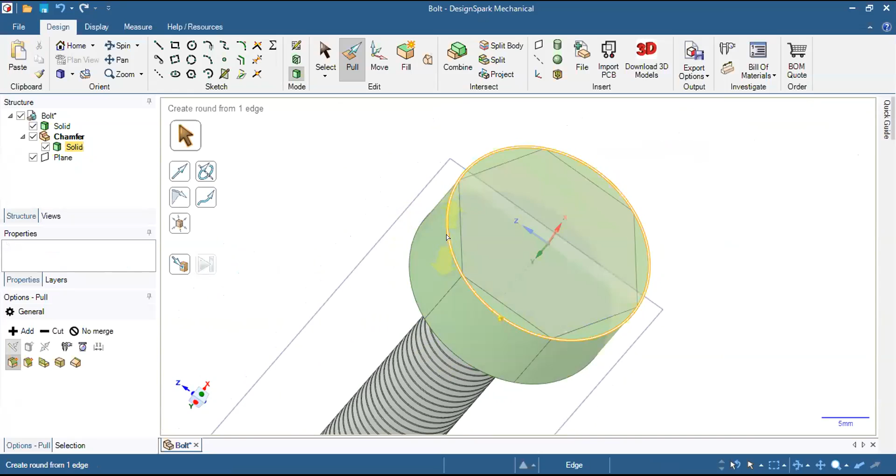If you want to provide chamfering right down below the bolt head, you can also do that, but you need to select this edge also by pressing the control button and the left mouse button. You can see both edges are selected and highlighted in yellow color. Once they are selected, you just need to select the chamfer command.

Once the chamfer command is selected, you can see an arrow appears. In order to draw the chamfer, you just need to drag it downward. You can see the dimension appear. For this case, I'm keeping it 1.5 and pressing enter.

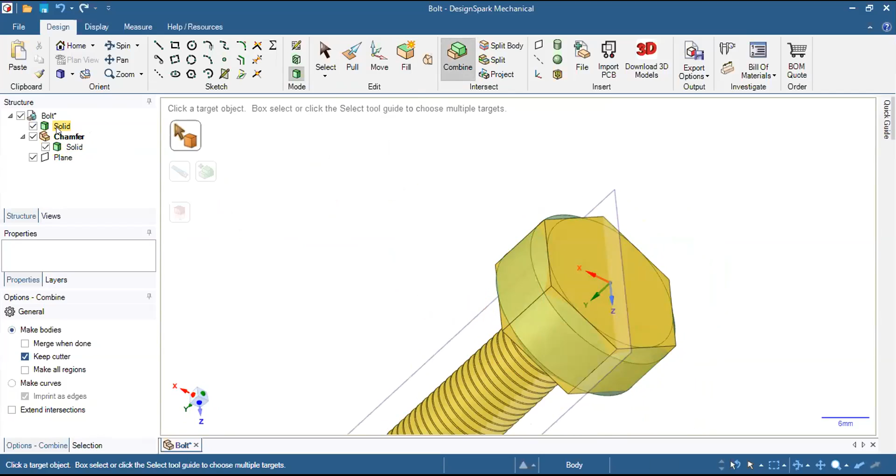So you can see there is chamfering provided to the solid, which is part of the chamfer component. In order to split into multiple parts, I'm clicking over the combine command, and once selected, you need to select the first solid from where to split another component. The first command is selected by default.

I'm just making sure that it is selected. I click the left mouse button again over the command, and I'm going to select the other component again, and you can see multiple solids have been created.

In the structure section, from here I'm just going to disable some solids which are not required in this particular case. This one is not required, this is required as the active component. This part is not required. This is not required, this is not required.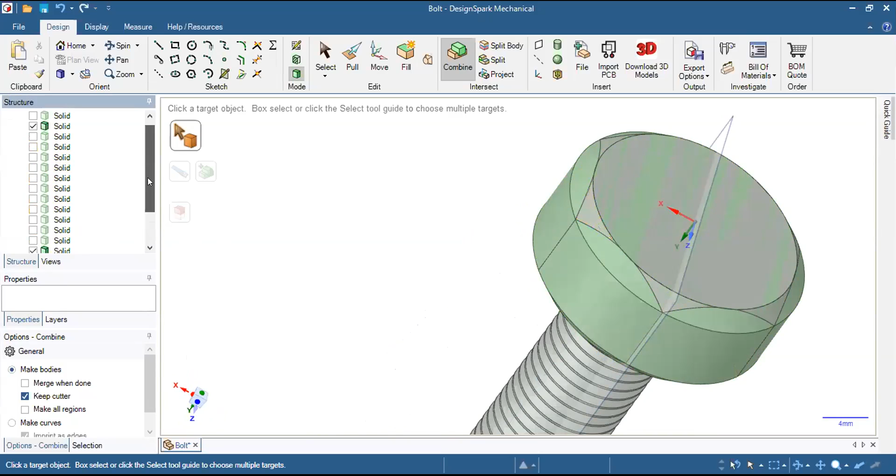All the sharp edges are not required in this particular case, so I'm going to disable all these sharp edges. And lastly, I'm going to disable the cylindrical surface. You can see the perfect chamfering has been provided around the bolt head.

And the same at the bottom. You can see this bolt is right now not an active component, so I'm going to right click on the bolt and make it an active component. Once it comes alive as an active component, it appears as a green color.

So this way we can provide chamfering and threading to the bolt. I hope this is understandable, I hope it is clear to all. I know it is a bit tricky to figure out what component we have to disable from right here.

But make sure, I just want to clarify right here: please disable only those components that are the sharp edges, particularly in the bolt head. It varies depending on the other component, on which solid you want or do not want.

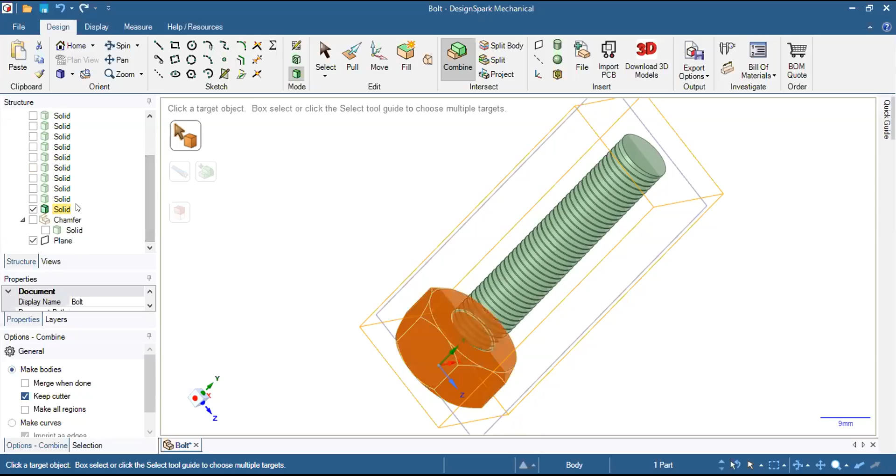If I'm talking about this, you are not required this part, so the head, you do not need the head in this particular case. You can also disable this. Once it is disabled, you can save it into the raw file and convert it into STL, and only this component will be printed. But if you enable this component and convert it into STL format, the whole bolt will be printed over the 3D printer machine. So please be specific in the selection mode, what component you are going to select, in order to get a perfect shape in the printing process.

We are clear with this. Chanpreet sir, are you able to hear me? Yes sir, this is fine. I think you have explained it quite well, and I agree with you, it is quite tricky how to do the chamfering. I think the second portion that you did with the circular thing made it a little more clear, because it is a little more visible, the chamfering, and people can relate to the actual bolt.

What I suggest is we can leave the nut part as an exercise and let people do it. On August 10th, when we have a discussion session, we can come back to it, and if people are finding any problem, you can show that again. Is it fine? Because now I don't think we have time, we only have like 10 minutes, and I don't think it will be correct to do it in 10 minutes, because it might require more time. You agree with me?

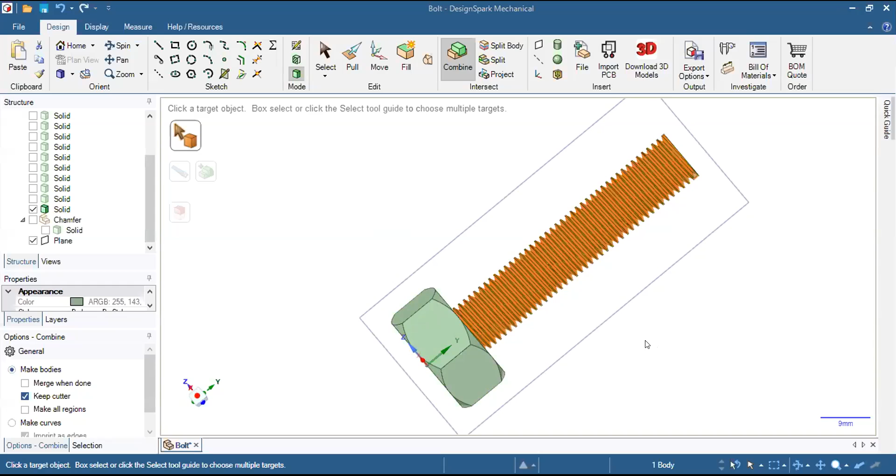Sure sir, sure. I have one question in the chat box, somebody is saying correct chamfer. I don't know what he means, so I'm unmuting that person, Padmakar, and maybe we can ask him what he wants to ask. Can you ask your question, Padmakar? Are you there? I'm asking you to unmute. Please unmute yourself and ask your question, because whatever you have written in the chat box is not clear to me. Padmakar, are you there? No, I hope there might be some issue.

So maybe you can show the video of the nut and bolt which you have 3D printed, and then we can conclude the session. Leave this again, I'm repeating, this nut is an exercise for you. If there are any, do we need to give any specification, Chanpreet, to them for the nut?

So for designing the nut, do we need to give any specification? No, there is no specification required, they can use the standardization. In this particular case, we can use an internal threading, and the dimensions for the hexagon would be, basically we draw the head or the nut of the bolt with the required nomenclatures, which is the D. Once we have defined the diameter of the internal threading.

Hello. Shabbi sir, can you please hold just a moment? Yeah, please ask your question. Hello, I am Padmakar Chikri speaking.

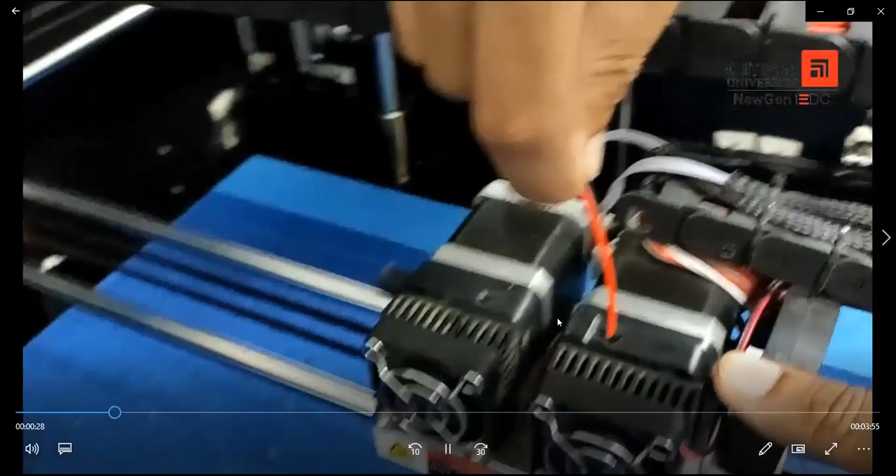So this one is the first extruder of the 3D printer, and this one is the second extruder. We are using the first extruder in this particular case, and we are printing the nut in red color using a PLA filament. Right now I'm just going to verify.

I'm verifying the extrude options right from the control panel of the 3D printer, to check the filament is perfectly installed or not. So in order to check that, I select the first extruder and define the increment, which is 10 mm, and select low speed, then select the 'in' option twice so 20 mm of filament is extruded from the nozzle.

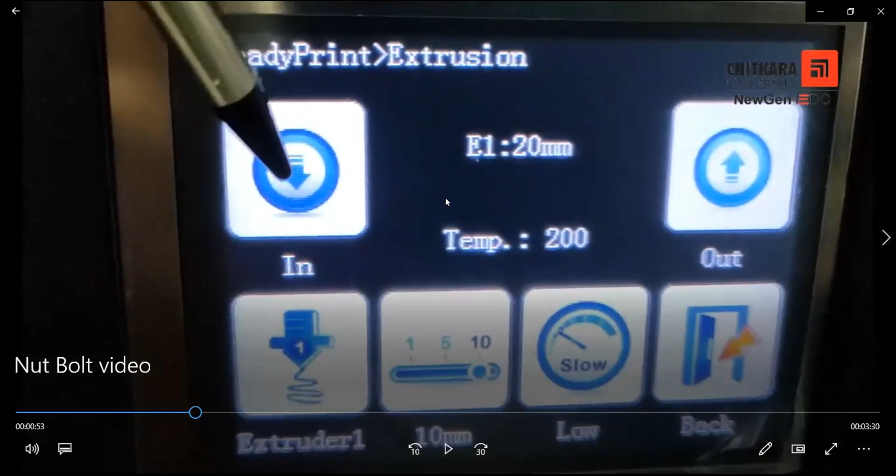You just verify that the material is perfectly installed, and if some of the material which was previously installed - let's say it was black color - the black or red could get mixed if I start at the very initial stage without removing the black filament from the nozzle.

So once I clicked on the 'in' option, you can see there is filament coming out from the first nozzle. You can see right here 20 mm of filament has been extruded by the nozzle, and we just need to remove this.

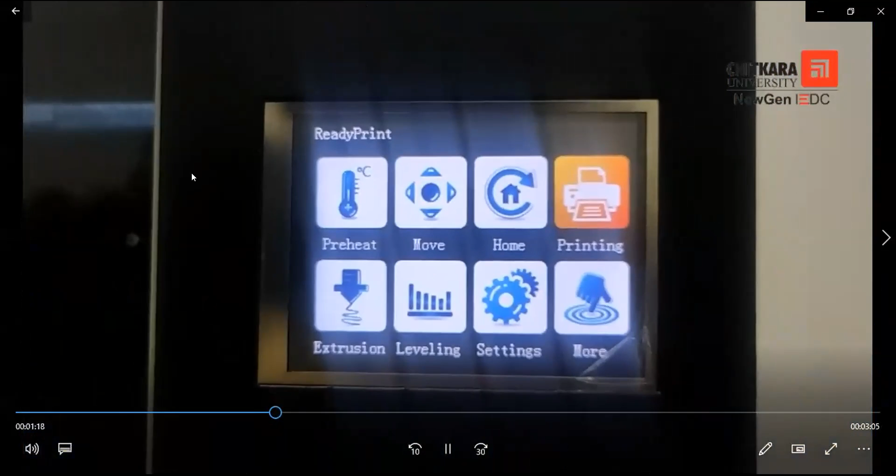Once it is removed, you can see the following commands right here. This one is particular for the extruder temperature, which I have defined as 200. You can also turn off the extruder or increase the temperature of the bed.

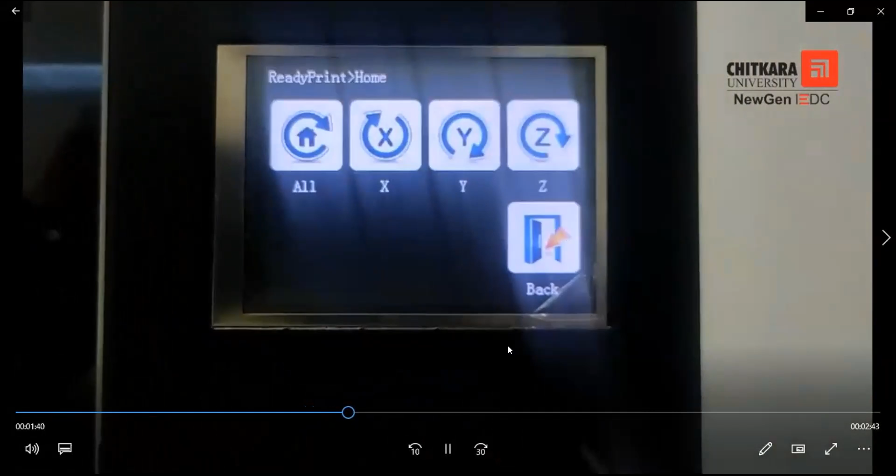In this particular move command, you can move the extruder into different coordinates, and also move it into the home position in XYZ. From right here, I'm going to select the required G code, which is the nut, and click the confirm button. Once the temperature meets the defined temperature, it starts printing.

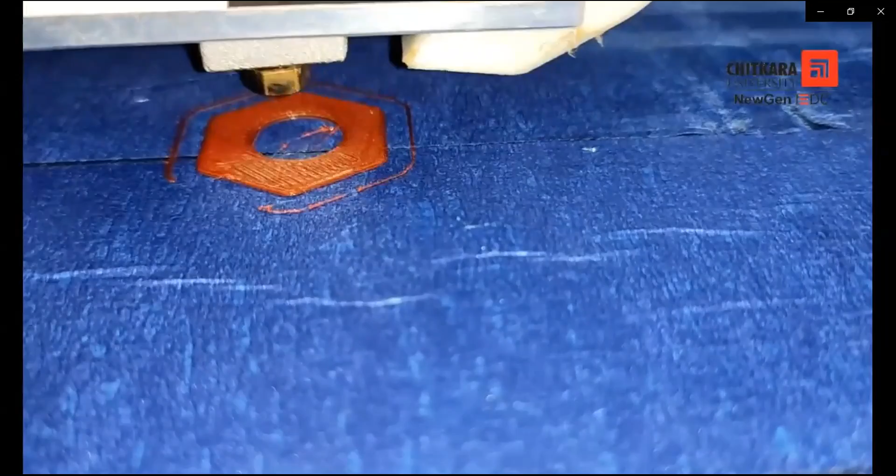So here you can see the very first layer of the nut. From here you can see the fill density which is filled in the nut body.

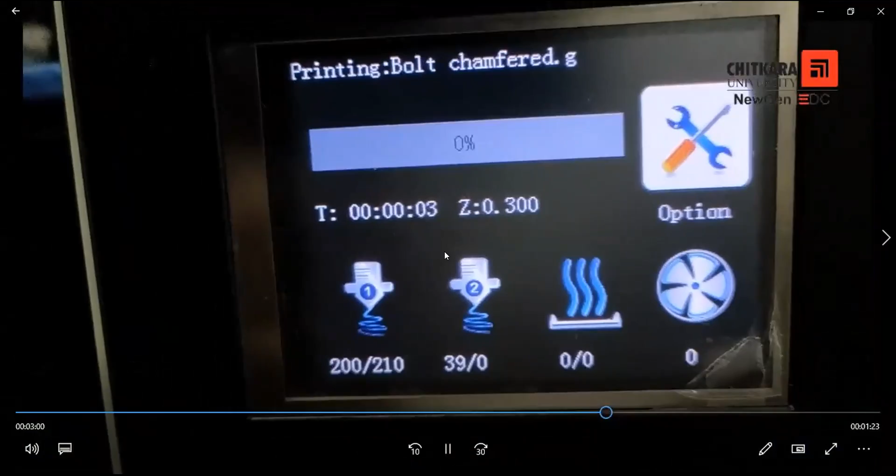Once it is completed, I am going to select another component of the same design, which is the bolt, converted into G code. Once it is selected, you can see it starts processing on the control panel, and the first layer is laid down on the 3D printer bed. In this case, it is printing the bolt head first, then the shaft along with the threading.

So you can see here, the same fill density is applied to this particular body, which is 20% fill density. So this is the final picture of the bolt.

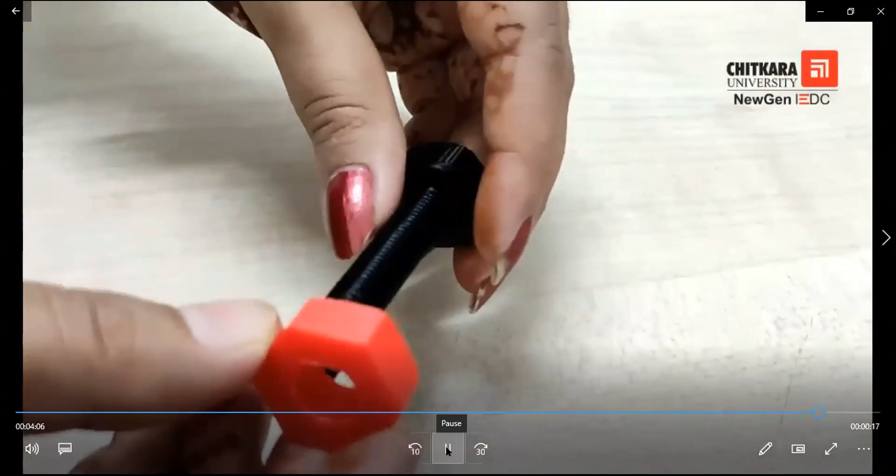So here is a little demonstration to just show that we can use these components this way, both components. Sir, over to you, Sagar sir.